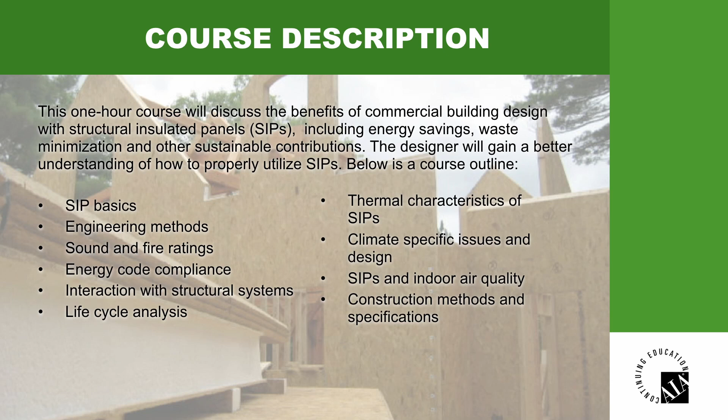A lot of what SIPS is about is the thermal characteristics and how they meet the codes and how they can provide a thermal envelope which performs much higher than some of the other competing systems. We're going to talk a little bit about the climate specifics and how those climatic conditions will change the detailing of SIPS and how you should detail buildings differently, obviously, in one climate zone versus the other. We'll touch briefly on indoor air quality, and of course we'll go over construction methods and specifications as we start to wrap up this presentation.

The objectives of this course will be such that you as a design professional at the conclusion of this course will be able to deliver some basic information about SIPs and their use. This would include both their composition, how they're made up, how they're applicable to codes and standards, additionally identifying the energy efficient characteristics of the SIPs and how they can improve overall building efficiency, a good understanding of waste reduction and the life cycle analysis benefits to building with SIPs, as well as how it relates to traditional wood framing. And of course, understanding how SIPs contribute to better indoor air quality by reducing air infiltration, as well as controlling any off-gassing issues.

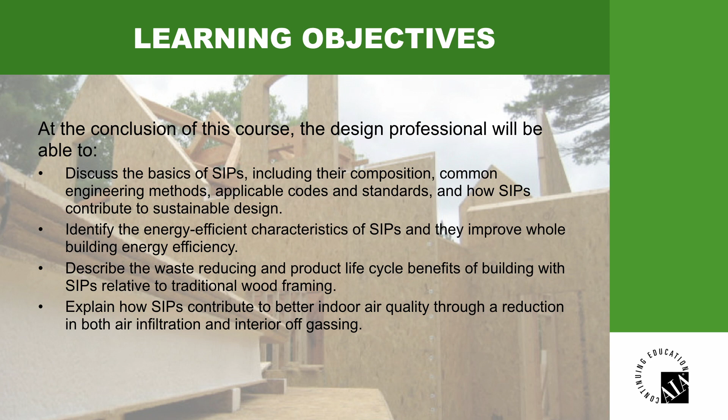So let's get right into it. What is a SIP? Let's start with the basics. What does a SIP look like? What's it made of? In essence, it's a composite structure. It's very simply, in most cases, 3 elements. It's a skin, a piece of wood glued to a foam core. The skin is on both sides. It has to be on both sides because this is what gives it its structural integrity.

As a composite structure, the rigid foam core is predominantly expanded polystyrene. That's EPS, or the white foam, similar to what you see in the photo. In addition, it could be XPS, or extruded polystyrene. This would be the foam that might be referred to as styrofoam, or the foam that might be extruded that would be green. So you might see a colored foam, green or blue. The other option could be polyurethane. Polyurethane is delivered a little bit differently, and we'll talk about that later on. The structural facings, if we are going to use a structural facing and create a structural panel, will usually be 7/16 Exposure 1 rated OSB.

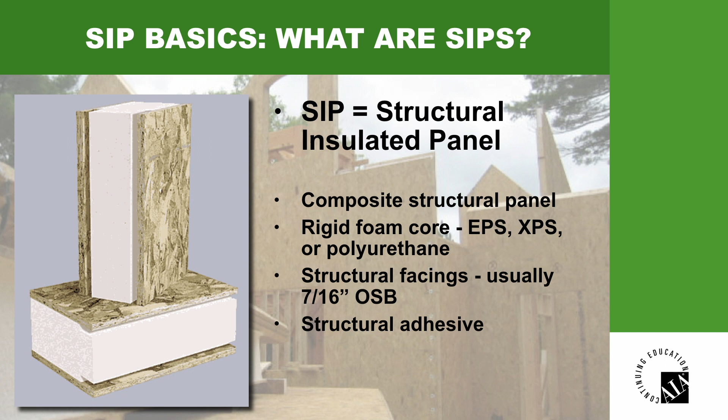And of course, the adhesive is structural in nature. It's very similar to the engineering grade structural adhesives that you might find in an I-joist, glulam, Parallam, any of the other wood engineered products that you see so often in the marketplace.

SIPs are not new. They've been around since the 30s. They were first developed by the Forest Products Laboratory up in Madison, Wisconsin. They were being researched in order to answer the question about eventually running out of wood. Even though it's one of our nation's greatest natural resources, it was determined that we needed to maximize the efficiency of that wood and come up with better ways to utilize it as we built buildings.

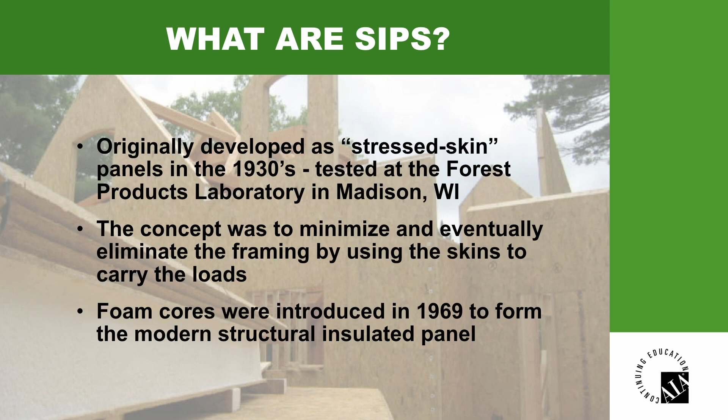And the methodology of taking that wood and turning it into oriented strands to create sheathing. Originally it was done with plywood. Now we're working predominantly with oriented strand board. And of course the foam cores were introduced later in the 60s. That technology, when expanded polystyrene or the plastics from Europe, the European building trades, found its way over into the U.S. market. The combination of the two created the very first SIPs that were laminated in the laboratory up in Madison, Wisconsin.

As I said before, the SIP contains three components: the skin, the core, and the structural adhesive. A SIP has often been compared in strength to a steel I-beam. The skins act as the flange and the foam core acts as the web. And by virtue of the structural adhesive holding it together as a composite panel, in order for it to bend, one of the skins is in compression and the other is in tension, and it gives it a great deal of transverse strength. As you can see in the picture, we also have optional electrical chases. We'll talk about that later in the program.

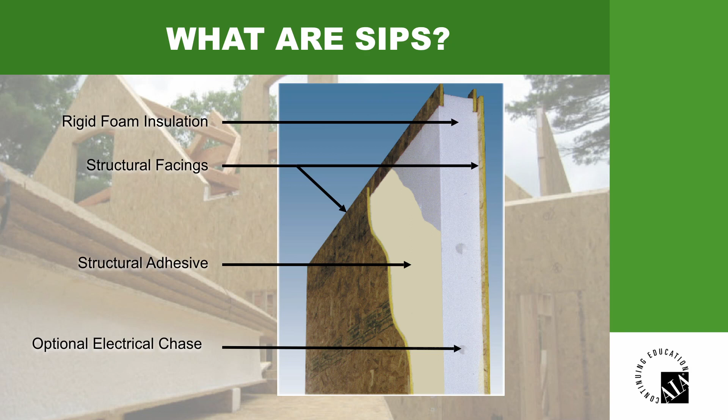There are many different types of SIPs. In this view, you'll see that insulated metal wall panels can be manufactured. They are often used as exterior cladding and will, in most cases, not carry axial loads. Most of the times you see metal skin panels being used, they are put over top of a pre-engineered metal building. So for instance, if a large cooler freezer building or something of that nature is being built, it'll typically be a red iron or a steel structure, and then the panels are attached merely as cladding. And with the metal skin on the face of it, that gives you a finished siding appearance or a finished cladding appearance, with all of the benefits of the foam core, so you get the benefits of the thermal performance of this type of panel.

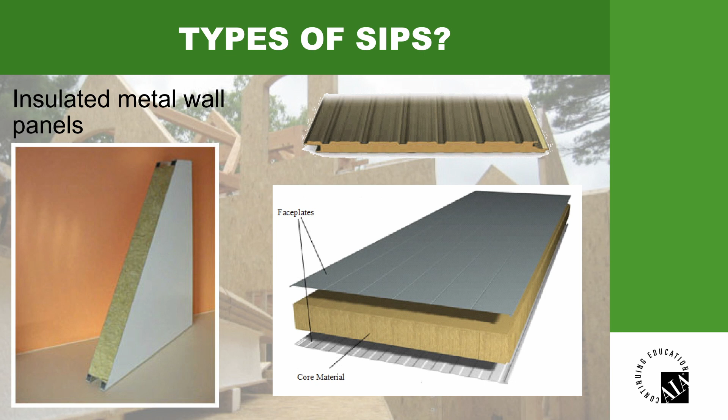In addition, another type of SIP might be one that uses a cementitious board or even an MgO, MgO being magnesium oxide. MgO has come on quite strong lately in the SIP industry in the last 10 years. The magnesium oxide board has a lot of benefits, as does cementitious board. But in both cases, they also have detriments. They don't have nearly the testing, the code approval. In some cases, they can be more difficult to work with. In some cases, they're more difficult to cut, or in fact, they create a heavier panel.

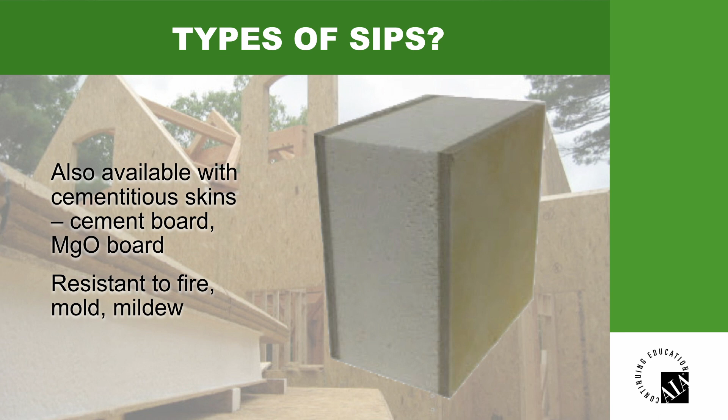All things have pros and cons, and MgO board and cement board and metal skins and other types of hybrid skins are no exception. Understanding what those pros and cons are is key to understanding how best to design the building and how best to specify which type of panel is going to be used most predominantly. The panel that, without question, is what we would consider the standard or ubiquitous panel within the U.S. or North America is going to be the 7/16 wood-skinned panel, but it's certainly not the only one that can be used.

Now, to further understand what a SIP is, it is not a pre-insulated stud wall. It's not the type of framed walls that show up either with or without insulation such that they get put in place. A SIP has a solid core. It replaces the wall studs and provides much higher thermal performance by providing a whole wall R value that is greater, substantially greater, than an equal thickness stud framed wall. It eliminates all the thermal bridges.

It has continuous insulation, so therefore we have the ability to improve the thermal performance, but not just that, we also can improve the carrying capacity. The idea is to use the OSB as the load-bearing element as opposed to using those studs. And this gives you a bearing area that is substantially capable of carrying greater loads.

As a designer, one must select various types of connection detailing. When we talk about SIP basics, an in-plane joint, whether it be a wall or roof, this is one of those very standard details that you might see. On the top left, you see what was referred to as a surface spline joint. The foam is recessed and/or finished in the manufacturing facility to receive the surface splines that are then put in along with either mastic or expanding foam and nailed off on either side of the joint, to bring the panel joint together and give you a continuous structural component.

One of the beautiful things that we like to point out with the surface spline connection is that the foam is continuous. There is no break. Similar to the surface spline detail on the left, if we look to the right, we see what is often referred to as a block spline. The block spline is also sometimes referred to as just a mini SIP. It's a SIP where the splines are laminated to the foam core and they fit into the edge of the panel where the foam has been relieved to allow that miniature spline, or block spline, to slide in. It can be sealed with mastic or foam. It can also be nailed off on both sides and give you the exact same finished result.

Whether the surface spline or the block spline is used is really a function of how the manufacturer has set up their operation in terms of treating the edges of the foam or the panels. Either one of these details is free of any thermal bridging, which gives you greater thermal performance because of a lack of heat transfer at the joints, and it is also an easier joint to seal to reduce air infiltration or exfiltration. When installing the panels in the field, stopping air infiltration and exfiltration is really key to optimum performance of a SIP system.

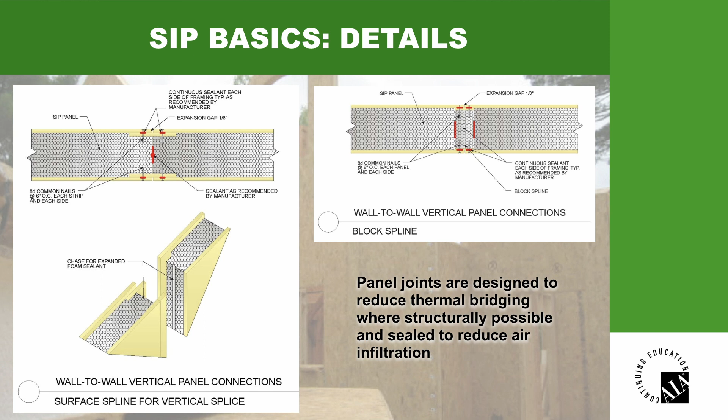One of the other SIP basics that you need to understand is R values, and R values can be a very tricky thing. First, let's look at the chart, all the way at the bottom at one of the notes. R values are determined or marketed at the mean temperature of 75 degrees Fahrenheit. We choose this temperature because foams will perform differently as the temperature increases or decreases. Some foams will also stabilize at an R value different than they are initially manufactured at, so the term aged R value is also important. Understanding both factors sometimes explains why manufacturers' claims of R values can seem higher or lower with no apparent explanation.

This chart gives true and fair R values that can be utilized when comparing the different types of cores. The EPS core in a 6.5-inch panel is around R-21.6. If we move to an XPS, it jumps up to 29.5, and all the way up to 32.9, or rounded to 33, in a polyurethane core. Understanding this is key to delivering the thermal performance required for your structure, and when considering whether you are meeting code requirements under either the prescriptive or performance method, keeping in mind there's more than one way to become compliant with the model energy code, and R values are a big part of that.

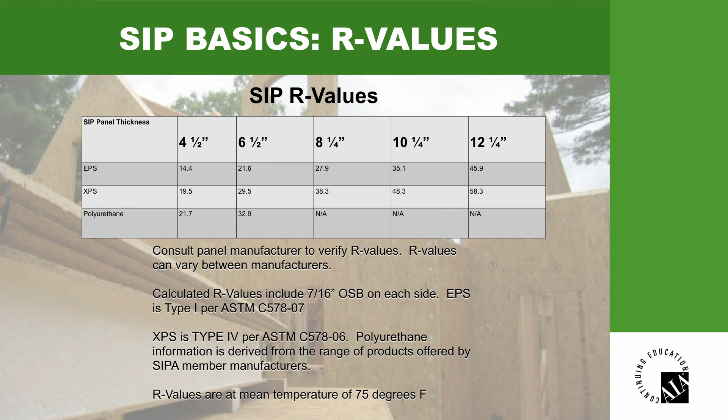Another basic detail shown here is what you might see in a corner. If two wall planes need to come together, we need to attach the two. The screws provided by the SIP manufacturers within SIPA include screws that penetrate wood, as well as self-tapping screws for light duty and heavy duty. The screw tip on the far right will self-tap into mild red iron up to 1/4 of an inch thick, so we can attach directly to a steel structure.

In the detail, the top panel runs long and the vertical panel is running short, and the connection of the two is the SIP screw, which penetrates into the shorter panel and pulls the joint together tightly. This joint is sealed with either foam or mastic, which stops air from moving in or out through that corner detail. Mastic is probably the most commonly used sealing method for a wood-to-wood connection.

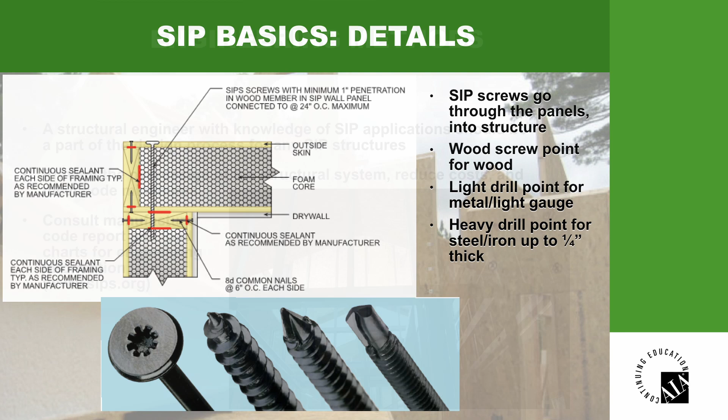One of the things I often see in commercial structures is the use of engineers in the design process who are not familiar with SIPs and tend to fall back on what they know and not what they need to know as it relates to SIPs and SIP construction. This will often result in buildings being over-engineered, which drives the cost up.

This is especially important in commercial buildings and hybrid systems such as SIPs with steel. Understanding how the SIPs can work, how they will provide structural support and structural stiffness to a building is key to understanding not only the design of the joints, but the fastening, the number of fasteners, how they are specified, and how the entire system is going to hold together and deliver that which is needed and not be over-designed and run costs up unnecessarily.

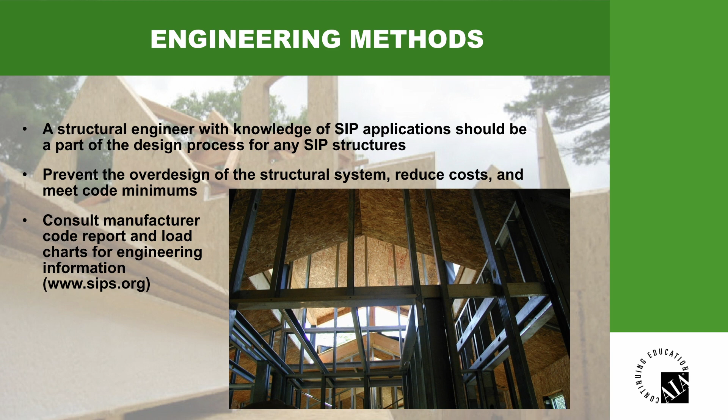Design professionals, engineers included, have the ability to use charts which are available from SIPA manufacturing members, and these charts will deliver all kinds of data that help determine the best design and the best detailing to deliver the proper performance. In this case, we have a chart that shows allowable axial loads, which will help determine the appropriate wall thickness. The engineer can use this chart to determine which panel thickness will be required based on the allowable loads that are going to be put on a specific wall.

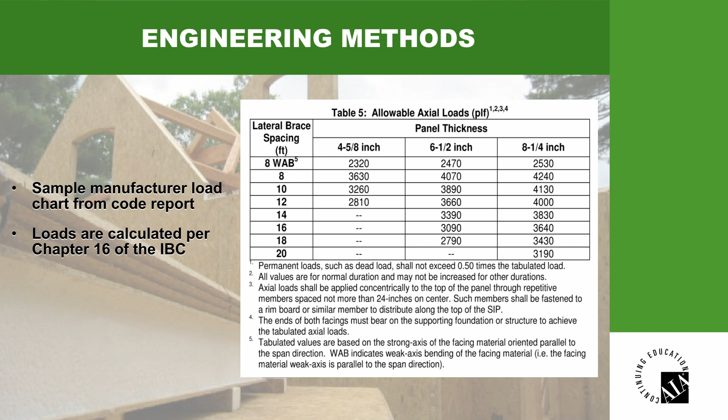In this case, the chart references transverse design load. Here we have transverse design loads for walls and roof, and this helps determine what the span and/or the spacing of the structural elements are within a structure. Not only the thickness of the panel, but the span and the allowable deflection will determine what the overall loading of that panel will carry based on the span.

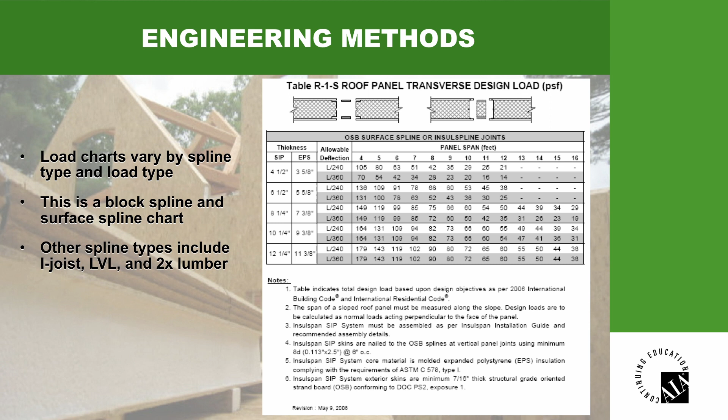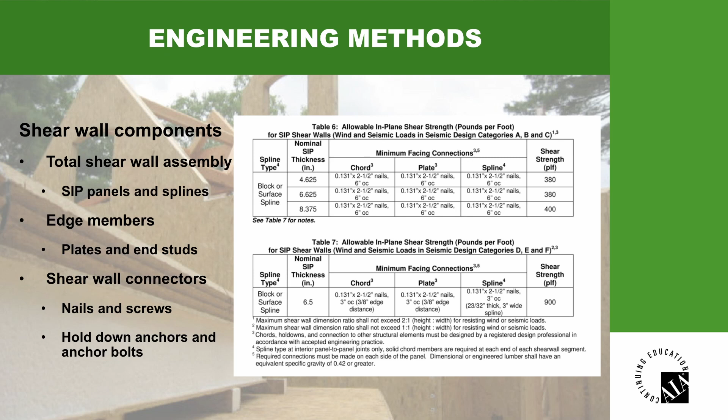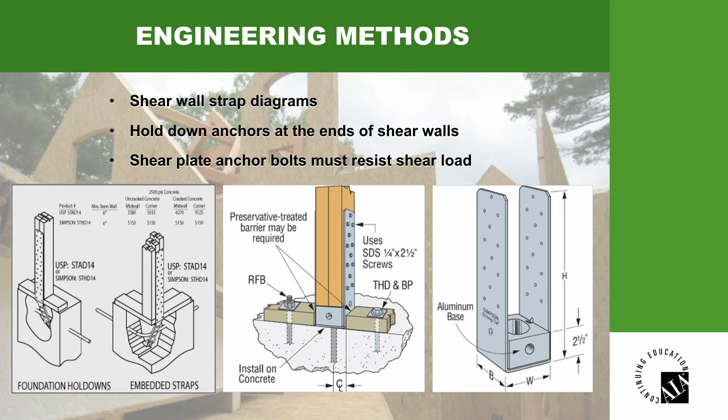And in that shear wall, it may be required that additional panel joints with dimensional lumber at that joint connection allow these anchors to be appropriately attached such that we can deliver the amount of resistance required for that shear wall. The values provided for shear walls are available to cover the seismic design categories, in addition to diaphragm values for the wind or transverse wind loads on the design for both SIP roof panels and walls. These are all available from the manufacturer.

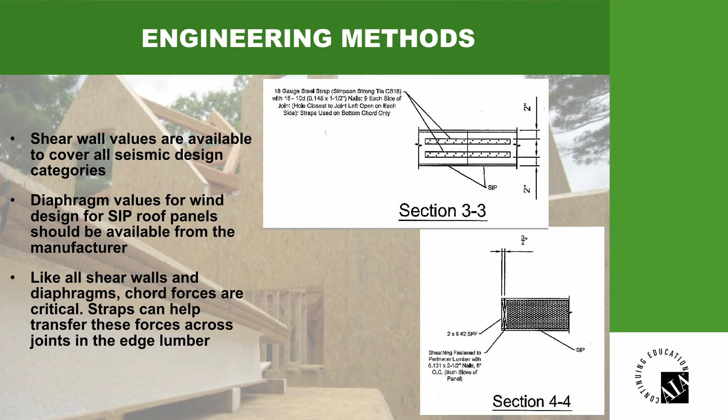And in all shear wall examples and diaphragms, the chord forces are critical. The manufacturers will provide and have the data that shows how straps can help transfer these forces across joints, especially those joints where we have lumber inserted, as we talked about in the earlier slide, where lumber joints may be required for proper attachment of hold-down anchors.

One of the often asked questions about structural insulated panels is headers, and do I in fact need headers? There are some simple rules of thumb, but what it really comes down to is how wide is an opening and how much material is above it. And ultimately, do I have a point load above that opening? This will determine whether a structural header is needed.

In many cases, with a uniform load, a fairly narrow opening, and a significant amount of SIP panel left above that opening, the panel, by virtue of the fact that it is structural, has the ability to act as its own header. So when we get into the design, one might suggest that you could eliminate cost, speed construction, and improve the thermal performance merely by making your openings somewhat smaller, or keeping enough material above those openings such that the panel has the ability to act as its own header.

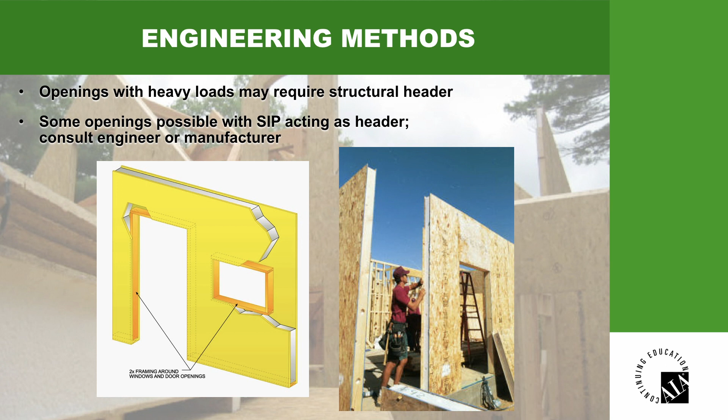The manufacturers have the charts which allow the designer, the design professional, or the engineer to determine whether, in any specific example, a standalone header is required or the panel can act as its own header.

Now, talking about fire ratings with SIPs, we must think of a SIP as a rated assembly, much like any other wall assembly. And a rated assembly is tested just as an assembly, not its individual components. Because the SIP is made out of wood, it has various restrictions that we must consider. We have to think of the assembly and not just the parts. Insulation or even wood is flammable, and so are many of the parts of an assembly.

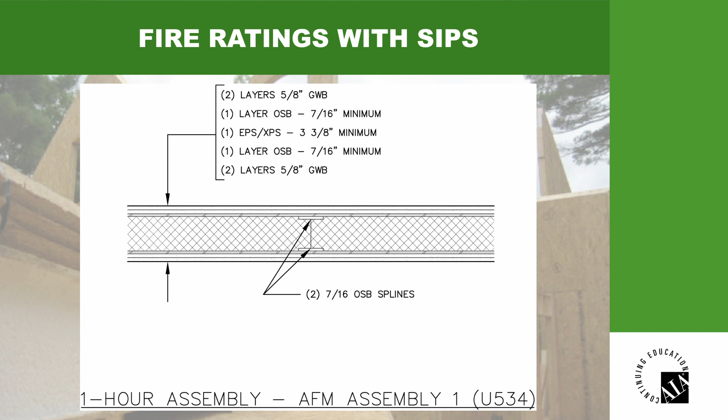Therefore, we layer on different components to get the type of rating that is desirable, and that's how SIPs create a fire-rated assembly. In this case, you'll note that over top of a 4.5-inch standard SIP, we apply 2 layers of 5/8-inch gypsum wallboard to create the 1-hour rated assembly.

Different types of fire-rated assemblies can be seen in this slide. On the left, you'll note that we still have a 1-hour assembly, but here a different type of spline detail is shown. This, of course, is the double-dimensional lumber spline with the same types of layering over top, only in this case with a single layer of 5/8 gypsum wallboard, and again we're seeing a 1-hour assembly here.

We move to the right, we see a 1-hour rated assembly only on one side of the panel, where we're applying 2 layers of the 5/8 gypsum wallboard to the inside, and of course the beam required to provide the structural support, and again we note that we have a 1-hour rated fire assembly.

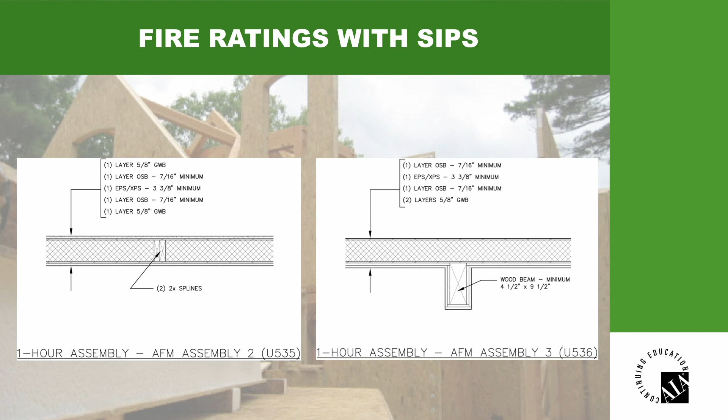If we move away from fire and we start talking about sound, we have to consider how SIPs perform in blocking or absorbing sound. This can be fairly complex. The sound transmission class, or the number that defines the rating of that assembly, is a function of how the sound is absorbed or passes through. STC-rated wall assemblies for SIPs have been tested and are similar to stud framing systems in terms of values. The SIP walls also perform very well with high frequency or low energy noises.

Where they tend to fall down is where we have very low frequency and high energy noises, where the SIP acts as a diaphragm, which of course it is, and it can transfer that low, heavy beating or thumping noise through to the inside. And this is where we have to add additional layers to get the type of STC numbers that we want.

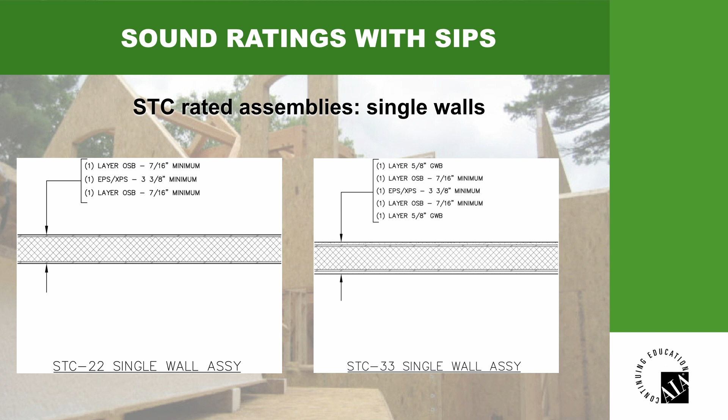If we look to the slide to the right, you'll notice that the STC number has now jumped to 33, substantially increased over the slide on the left, and this is because we've attached gypsum wallboard to both sides of the assembly. One layer of 5/8 gypsum wallboard adds a lot of mass, and of course mass helps the STC number or the sound performance go up substantially. In this case, we're up to an STC of 33, still a single wall assembly.

One thing that we have noted over the years with SIPs, even though in some areas the STC number seems to be relatively low, is that it must always be considered that a lot of sound travels through assemblies by virtue of cracks or holes in the wall assemblies. When you have a leaky assembly that leaks air, it also leaks sound. So sound that travels on air doesn't get into an airtight structure.

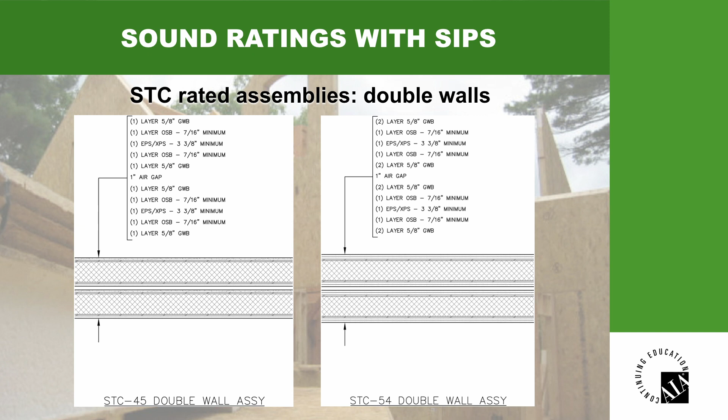Whereas if we make that structure airtight, the only way that sound gets through is by going through the wall assembly, and this is why the low energy, high frequency sounds tend to cause our STC numbers in the SIP environment to drop quite substantially. Adding that mass and making an airtight assembly will create a very soundproof assembly, and clients have time and again told us that SIP houses perform very well when it comes to soundproofing.

This building, located in New York, is an example of SIPs in metal framing as well as structural steel.

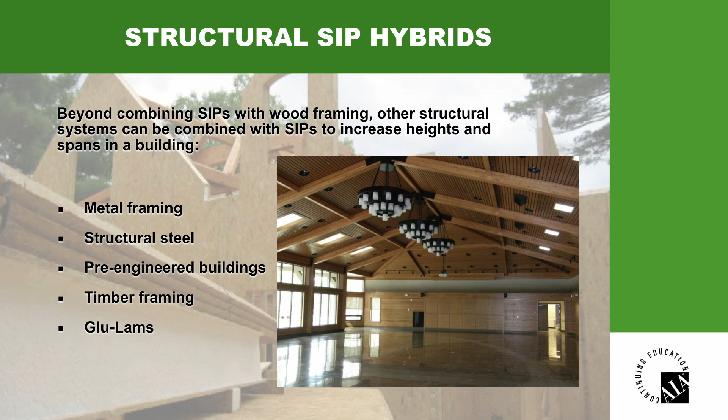It uses a 6.5-inch wall panel. When I say 6.5, it typically means a 5.5-inch core, which will accommodate a 2x6 dimensional lumber inside between the skins, so we call it a 6.5-inch panel, and a 10.25-inch roof panel. The panels are over top of structural steel beams.

The beams are separated by 18 feet, so you got an 18-foot span on the roof panels, and inside the panels, the SIPs are spanning from beam to beam, and they have a structural I-beam, wood I-beam, as the joint, in-plane joint connection on 4-foot centers that help allow that roof panel to carry that large span.

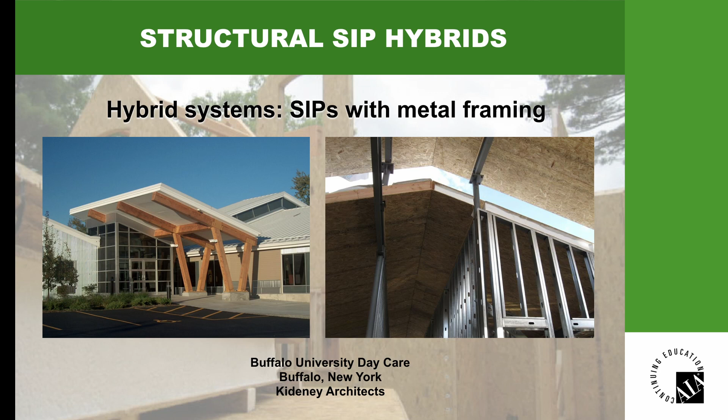Not only can it span those distances, which in some cases allow us to remove a significant amount of steel to help lower the cost and make the building lighter, but also the panel, by virtue of the fact that it's a continuous diaphragm, allows for the bracing or a reduction in some of the bracing, cross bracing, that you would typically see in a steel structure. The roof itself is acting as a giant diaphragm or a giant brace on top of that steel I-joist.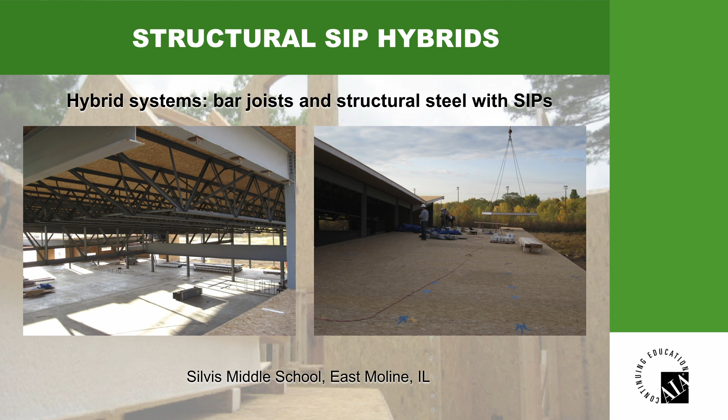The success of this building is really a function of the coordination of both the architect, the structural engineer, the SIP engineer, the SIP manufacturer, and even the installer of the SIPs. All these people must work together in order to guarantee the success of the project, such that everybody knows what is being done, how it's being done, what the details are, and how the building is going to be put together.

The roof was all 10.25-inch panel, and again, I point out the fact that the purlins, or the roof beams, are spaced wider than you would normally see in a building of this type and size located in Minnesota, where the snow loads are substantial. And the reason they're doing this is because the panels have the ability to create some of that span. So you're still handling all the loads, you're just doing it a little bit differently. And while you do that, you have the ability to reduce some of the steel costs, which lowers your overall cost of your structure.

This building has an unbelievably low heating bill throughout the entire winter, and they save hundreds instead of thousands of dollars a month during the winter by virtue of the fact that their heating bill is so low. I mentioned timber frames earlier. SIPs and timber frames are a natural fit. We sometimes will say it's the technology of today over the old world craftsmanship of yesteryear.

In this case, you'll see the traditional mortise and tenon timber framing, and then the panels wrap that frame. And when they do wrap the frame, they actually give that frame an unbelievable amount of stability and bracing where the panels can act as a shear wall.

Now, if we look at this big gable wall with all the windows on it, I would suggest that that's not necessarily going to provide all of the shear just by virtue of the panels because of all of the openings. So there's some real engineering that has to go into this design, one for the gravity loads of those beams which penetrate the structure, and underneath that there's going to be posting all the way down. But the timber frame and SIPs provide beautiful structures.

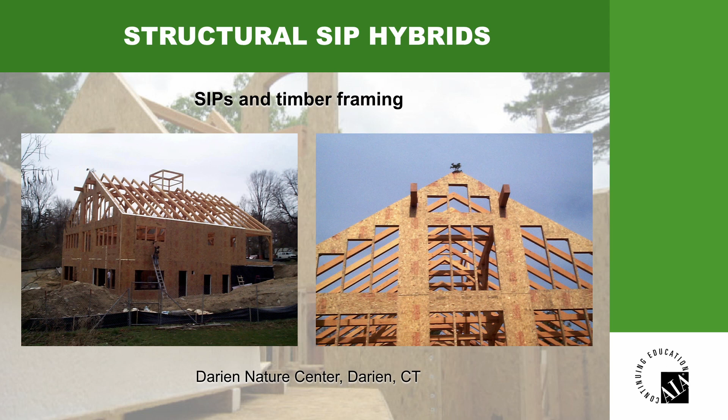They are relatively easy to work with, easy to build, and having panels that are as large as 8 by 24 means that we can cover a frame up very, very quickly. And of course, attaching to the wood beams and posts and purlins is very easy for a SIP installer.

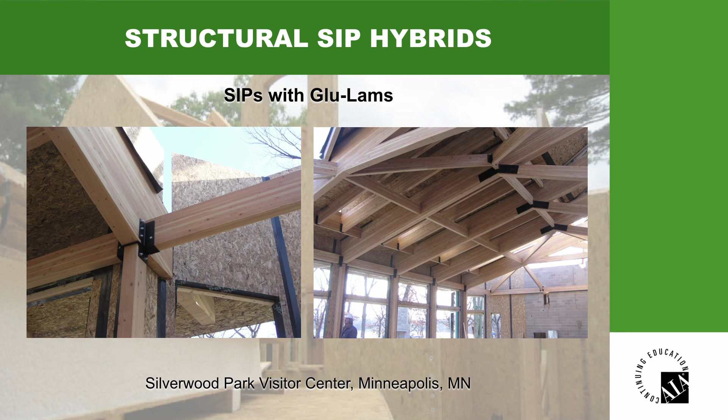Here you can see various glulams with structural steel connectors. This provides for a very interesting look, and with all of that wood in there, certainly the attachment of the SIP wall and roof panels is very, very easy. It's a very nice design, and again, it allows the architect or the designer a lot of latitude on what the building is going to look like and still providing optimum performance.

One of the concerns we always have as we move into design is code compliance. And as the compliance for the Model Energy Code increases, as we have seen both in the 2012 and the 2015 codes, the use of continuous insulation provides a significant benefit, a higher R value, and of course airtightness becomes a very key element in code compliance as the Model Energy Code increases even more and more. The 2012 has seen a 13% increase in efficiency over the 09 and 30% more efficient than the 06.

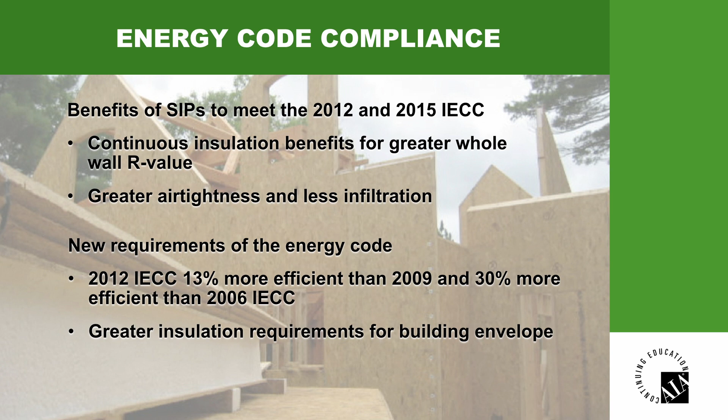So these insulation requirements in the building envelope continue to increase, and SIPs in every way, shape, and form, I will say, easily allow compliance with the code as it relates to delivering an airtight continuous insulation envelope.

A key element of code compliance, and even more so than code compliance, is the detailing, is to fully understand the IECC climate zones. The climate zones are broken into moist, marine, and dry, and they, of course, in the lower 48 go from 1 to 7. Depending upon where you're designing, very clearly should dictate how your design addresses the movement of heat or addresses the movement of humidity within that structure.

And your design detailing very clearly should take the location you're building into effect. We don't design buildings for Florida the same way we design buildings for Minnesota, because they don't work. The building science rules must be strictly adhered to in this situation.

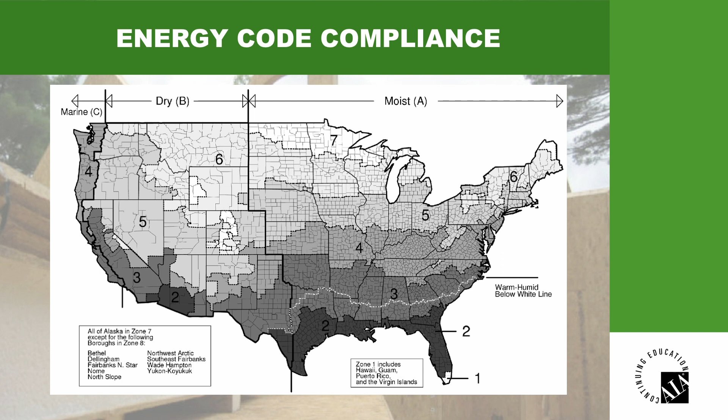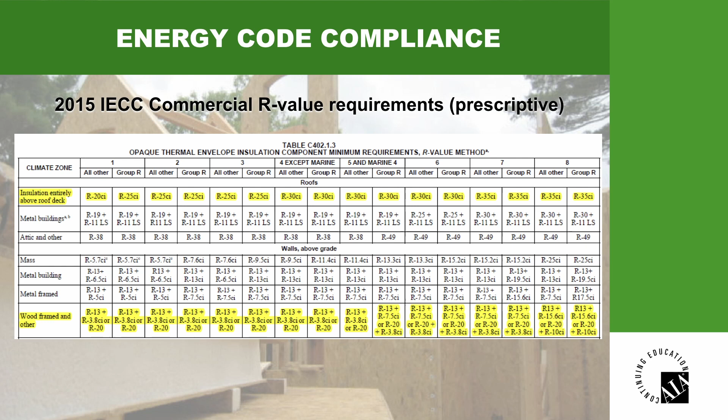Before we look at the other methodology of code compliance, i.e. the performance method, let's talk about why that might be beneficial. If we go to the Oak Ridge National Labs and we look at their studies that they've done on SIPs, they break down what continuous insulation, no thermal bridging, and how that affects the overall R value.

If we look at the R value of just the insulation, for instance, in a wall insulated with batt insulation, we're again just looking at the insulation, and it might be an R13 or an R24 or R30, whatever that might be. That doesn't take into consideration the framing factor or how much stick framing there is in that wall. If we look at the SIP, where the framing factor is infinitely lower, we have what the code allows us to refer to as continuous insulation.

By having greater amounts of insulation, and on top of that, far less air infiltration and exfiltration. We can see in this chart that was part of Oak Ridge's study that a 4.5-inch SIP, pictured on the far left, had an R value in whole wall performance actually greater than the 2x6 stud wall, 2x6 studs at 24-inch centers, with a quality installation, meaning the batt installation was installed properly per the manufacturer's recommendation.

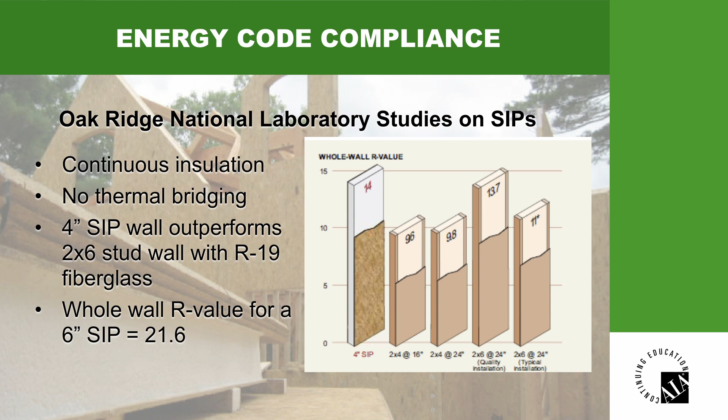So even in this case, although the rated R value is actually less than the 2x6 stud wall, in whole wall R value performance, you'll see that the 4-inch SIP outperforms the 2x6 batt insulated wall. Very interesting when you consider how assemblies truly perform more so than what the rated R value is.

And of course, if you do not believe the whole concept of thermal bridging, all it takes is a little thermography to look at a wall when it's warm on one side and colder on the other, and you can very quickly see how it is that thermal bridging, or the transfer of that thermal energy through any solid lumber components inside that wall, will very quickly rob your building of optimum thermal performance.

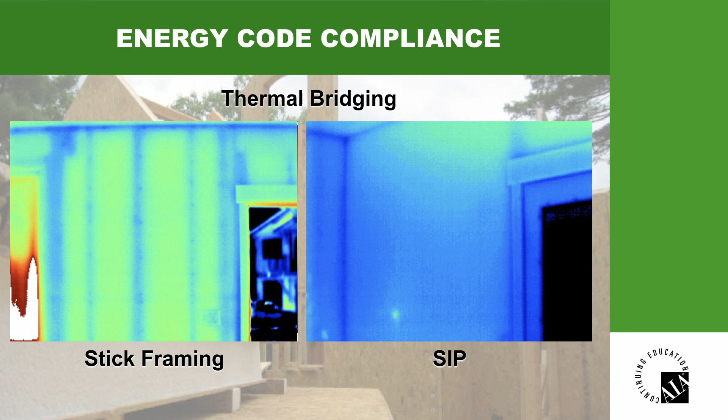Okay, let's get back to code compliance as it relates to the performance method. In the performance method, we don't necessarily look at a line in the sand for a particular R value and say that meets the prescriptive method, or that meets the value required by the code. We look at the entire building, and in that whole building, we model the building using any one of many different types of software packages, basically doing a Manual J calculation and determining what the overall BTU heating and cooling requirements are.

And when we do this, we take into consideration air tightness, and the air tightness has a huge influence on the overall performance of a building. And therefore, the performance method allows us to show code compliance when the prescriptive method might suggest that that very same building is not compliant with the code. And of course, showing this code compliance means that in many jurisdictions, the code official will require that COMcheck or other approved software is used to verify that that meets the code.

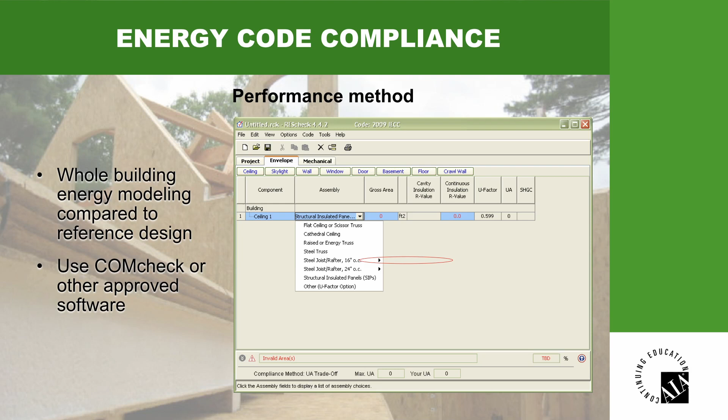One of the other issues that often comes up is the idea of Energy Star commercial tax credits or tax deductions. And in this case, Energy Star currently provides credits or tax deductions which equate to $1.80 per square foot. And this assumes a certain performance level of the building. So using the approved energy modeling software to show that the building performs at a certain level, this will show code compliance and perhaps allow for commercial tax credits.

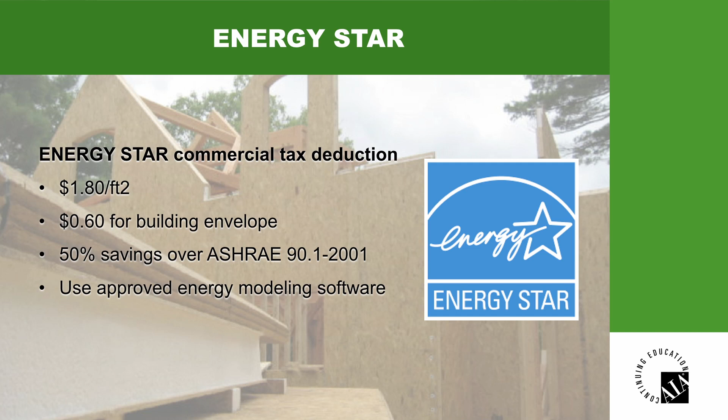Now, in order to get all of the optimum performance and the tax credits and all those other things that both you as the designer and the owner of the building want, requires proper installation. And installation is really a very key component of the success of your design and your building. In order to get good installation, we have to always be addressing air tightness. Not only do we have to hire and specify somebody that knows how to install panels, but there should be a methodology to prove and verify that the air tightness is in fact being delivered by good installation.

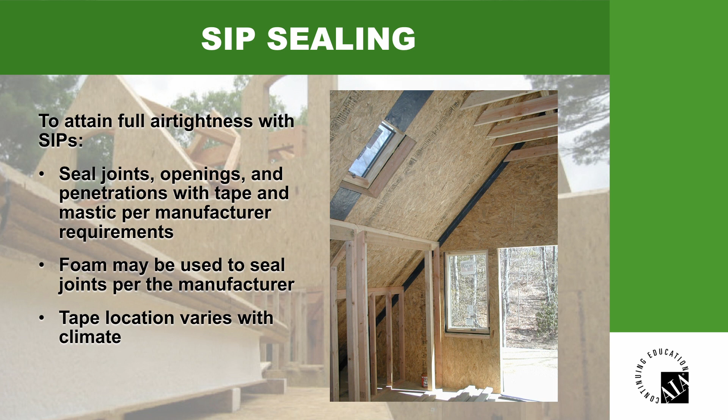When the installers of panels are working in the field, they have a number of methods by which they can create an airtight joint. It might be a gasket, it might be an injected foam, single component or two component foam, it might be mastics or tapes, and all of these details are largely driven by the manufacturer that is being used, and this will dictate how the installer uses these components to deliver a very airtight, high-performing assembly.

Many of you may be familiar with the architectural challenge known as the 2030, which can be found at architecture2030.org. And this is a challenge to architects and design professionals to improve our built environment. It is a movement towards the reduction of carbon emissions and eventually to meet carbon neutrality for the building industry in 2030.

And it's based on the idea that we can build buildings with greater insulation, greater continuity of insulation, as well as air tightness and reduced infiltration, things that I've talked about before, and of course reducing the construction waste so that all of our buildings are more gentle on our environment and will deliver higher performance for this carbon neutrality for all of the buildings by 2030.

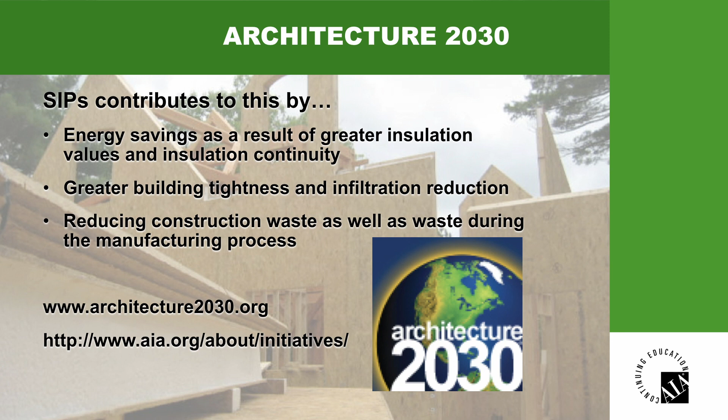We touched on life cycle analysis earlier, and basically, as you probably well know, the life cycle analysis looks at the manufacturing of a product all the way from the very beginning of sourcing its raw materials all the way through construction, and then how much energy it consumes over its life. In essence, what we're saying is we use a lot of energy to mine and produce the materials, the natural resources that are used to build a SIP, and that might be higher than other forms of construction.

But then once the project is built, we're saving energy substantially more so than over two-by construction. So what happens? Well, over a certain number of years, we start seeing a payback in that we are saving more energy than we ever used to produce those components.

The EPS Molders Association's analysis shows that within climate zones 1 through 5, you're seeing an average payback of about 5.1 years, and that is even a little bit lower in terms of recapturing the greenhouse gas emissions. Again, zones 1 through 5. If we go to the higher zones, it happens even quicker because we're saving more energy comparatively in the colder climates. Other analyses have been done both by BASF and the Oregon Department of Environmental Quality.

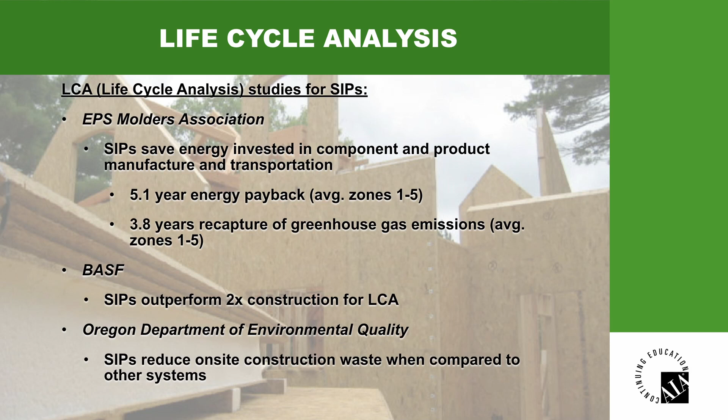The BASF study showed that the SIPs outperformed 2-by construction for a life cycle analysis, as well as the Oregon Department study showed that the SIPs reduced on-site construction waste when compared to other types of systems.

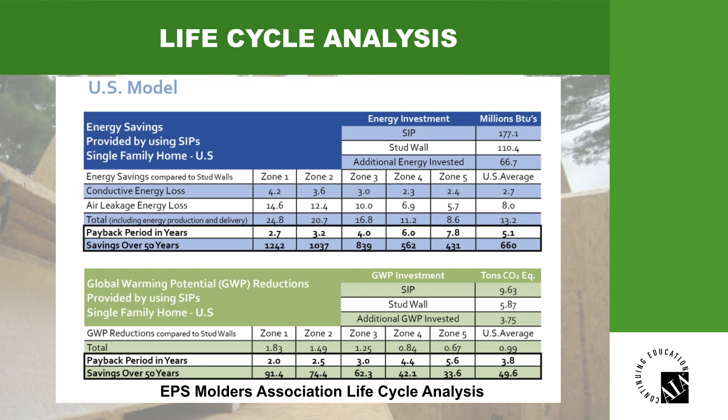And then if we drop down to global warming potential reductions, we again see that comparing the SIP and the stud wall, you have a difference in terms of tons of CO2. The SIP appears to be greater, but then as the structure is lived in and the savings compared to the stud wall, you get an overall comparison of a payback of about 3.8 years before you're starting to see the savings in CO2. And of course, if you look at the savings over 50 years, you see almost 50 tons of CO2 being saved over that equal stud frame wall.

Why we want to look at this is because we're concerned about any water vapor or moisture within the assembly. Will it ever condense? So if we have any leaks or any movement of air in that assembly, if that warm, moist air comes in contact with a cold outside skin, we have condensation, and condensation leads to mold and rot and mildew, and we don't want any of that.

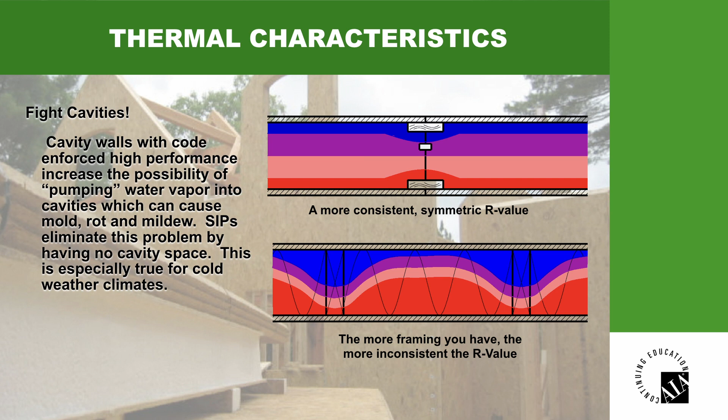We talked earlier about climate zones, and here we're talking about climate-specific design as it relates to various areas in the country where we have more or less moisture that we have to address. If we live in an area of the country where we get a lot of moisture, the detailing must be different. We do this because of the durability of the structure. This is not a SIP-specific issue. This is any building issue. Where it rains more, we must allow for the drying potential of that building.

Special consideration should be made for designing with SIPs in cold and wet climates. And it's done to prevent intrusion as well as mold growth, which imparts poor indoor air quality and creates hazardous environments for the indoor occupants. With water intrusion, the bulk water and liquid moisture from the outside coming in is done so through wind-driven rain.

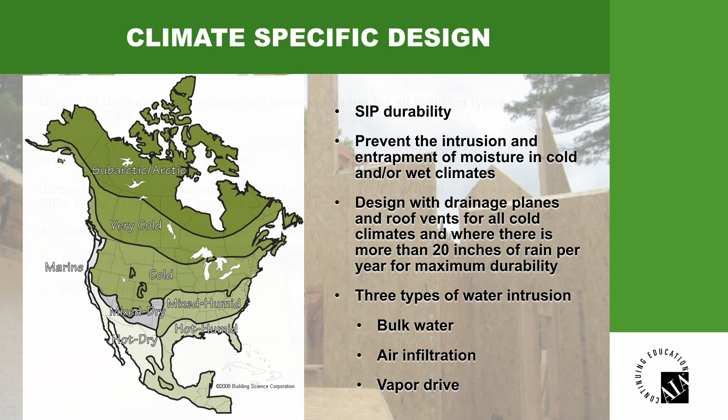You must know what climate you are building in to effectively put the proper detailing on your drawings to address not only bulk water, but air infiltration as well as vapor drive. We start talking about climate-specific designs, and the idea of building science really comes into play.

I'm a huge proponent of back ventilation or drying. SIP structures and other high-performance, low-energy buildings automatically have a lower capacity to dry because they don't have a lot of energy or heat moving through the assemblies to help them dry out. Because they don't have a higher capacity to dry, we need to promote within our design additional opportunities for those

Consider Murphy's Law in that moisture is always going to get into your assembly. In one way or another, it's going to get in. So your job is to create a methodology for it to get out. Easily and quickly, your assemblies should be able to dry.

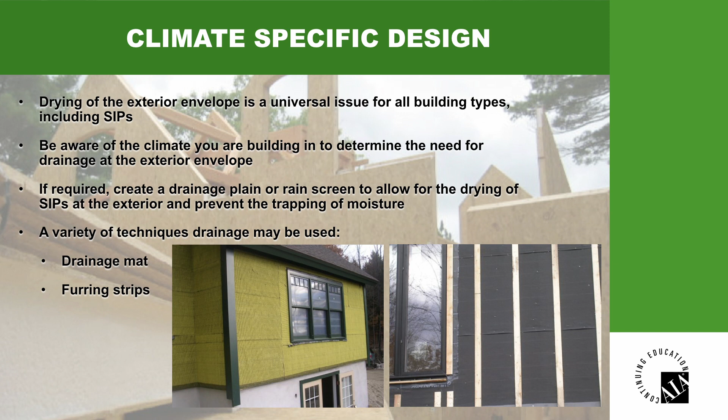Whether you use a drainage mat or furring strips, whatever your strategy, the climate zone that you're building in and the amount of water and vapor that you need to address should determine how robust a drying opportunity you give your building to lose that moisture and dry out on whichever side the system has to dry.

As we look at the cladding of your structure, regardless of whether that cladding is wall or roof, we need to consider what is the appropriate method to drain that moisture away. Roofing paper is an acceptable means to help dry or help create a drainage plane under your cladding. In this case, it might be shingles, to move that moisture down and away from your building.

If you're in the colder weather or the wetter weather, then perhaps not just roofing paper, but again, we go to back ventilation where we build a second layer of roofing or we use some type of ventilation matting to provide for the movement of more air under that cladding to help dry things out.

In some cases, standing seam metal roof. It's a wonderful roof cladding, but in the right environment where we run the risk of additional moisture being trapped underneath that metal, then perhaps a ventilation mat is required to help increase the durability of that structure. Now, if that metal wasn't standing seam but was a multi-crimped metal, well, you have a self-ventilating cladding.

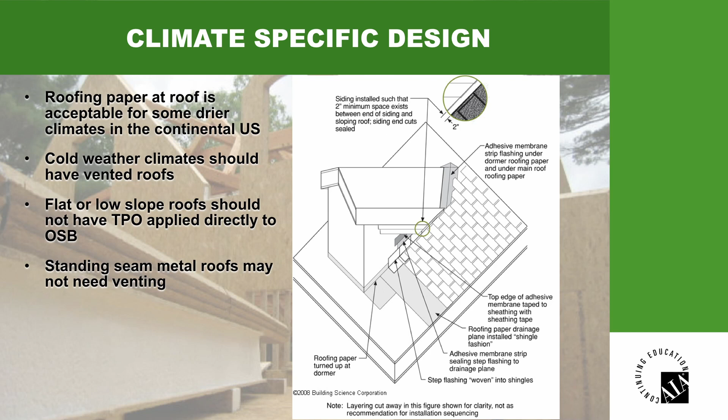Key element is always to look at what type of cladding you're dealing with. If that cladding is self-ventilating, it's got a built-in methodology of promoting drying. So in some cases, in climates where I'm worried about moisture, I will automatically look to claddings that are in fact self-ventilating. For instance, a tile, a multi-crimped metal roof, some types of sidings which allow for air to move behind them. Some of the shakes or the shingles that have an attachment such that it creates airflow behind the cladding itself.

I want to talk briefly about indoor air quality as it relates to SIPs, given the fact that they use OSB as their standard sheathing. The OSB of old used a urea resin in their binders, which provided for formaldehyde in the product. Today's OSB is produced with a phenolic resin, and the amount of formaldehyde is absolutely negligible.

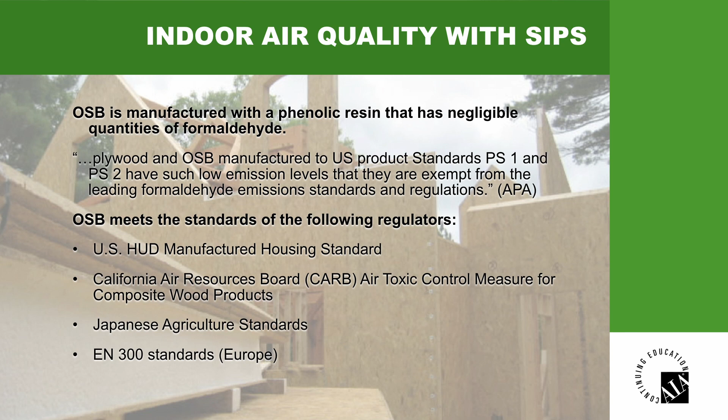We can easily show compliance by using the product standard, which is a PS1 or PS2, low emission levels, which are compliant with both HUD manufacturing, California's CARB ratings, as well as Japanese and European standards for formaldehyde. In essence, formaldehyde is virtually a non-issue as it relates to SIPs when using OSB. The amount of formaldehyde that you will see in testing is below the amount of formaldehyde that you will be exposed to if you were to be outside in the natural environment.

As the designer, there are many things that you must pay attention to during the design phase to ensure the successful outcome of your structure. Coordination in all areas may need to be rethought when considering a SIP structure. For instance, HVAC. Who's doing the sizing of the HVAC system? What is the actual tonnage based on the low energy consumption of this building? In most cases, rules of thumb will absolutely put you in the wrong size system and must be avoided at all costs.

So proper design and size equipment has to be taken into consideration, as well as window and door openings. Electrical. Somebody needs to talk about electrical runs requirements such that the owner's requirements, the need for electrical, is addressed by the design of the panel drawings, and the manufacturer has the ability to put electrical chases where required.

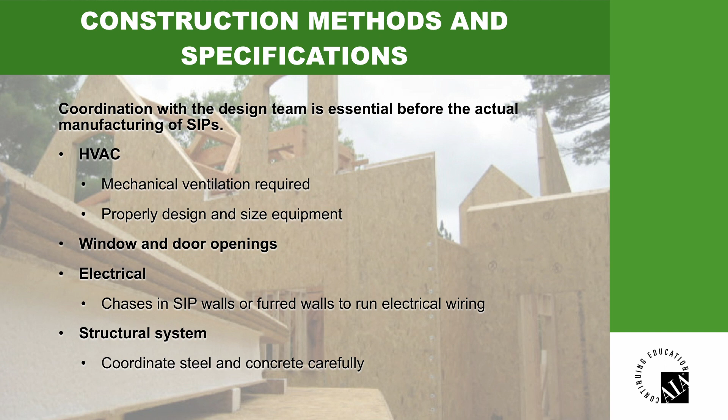The structural system, coordinating the steel and the concrete so that we have the appropriate support and the tolerance of those support systems such that the SIP system works appropriately on this. Coordination with the SIP manufacturer is going to be key, as well as the installer of those SIPs, so everybody again is on the same sheet of music and the success of the building is ensured because of proper planning.

Talking more about SIPs electrical, or the electrical systems within a structural insulated panel wall or roof, very easily addressed by the manufacturers having developed standardized wire chases which are placed inside of wall and roof panels, either horizontally or vertically, to allow for the standard movement of wiring through the panels for easy connections, either connections around walls from floor to floor, or as well as into any box or lighting box for the electrician to make those connections.

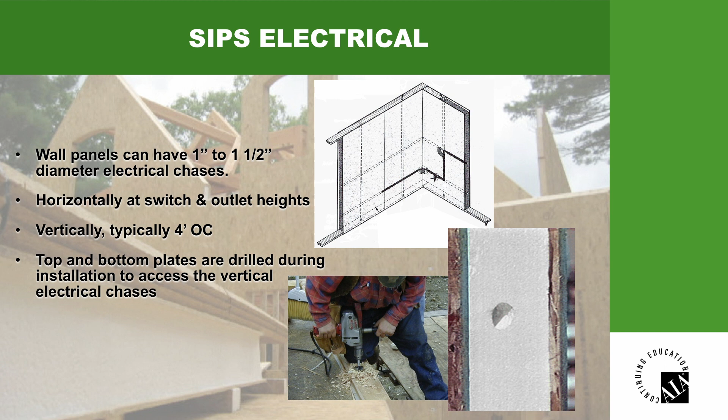We have standard heights. Those can be removed, they can be added. Holes in SIPs can be provided by the manufacturer to allow for any of these mechanical system runs, specifically electrical, and you can also request additional wire chases if, for instance, you had a sconce light and you needed a horizontal wire chase at the 6'2" level off of the floor. It can be done. It just needs to be discussed. It needs to be coordinated with the manufacturer, so when the panels are delivered, they are in the configuration that makes your building a success.

Specifications are incredibly important, assuming that they're going to be followed on your particular project. This allows you to specify types of panels, as well as very specific things like installers that are required for this particular building. You can find specifications certainly at the Structural Insulated Panel Association's website at sips.org. You might also find those boilerplate specifications on the particular manufacturer. They provide those specifications. Of course, those manufacturer specifications are going to predominantly promote one particular type of SIP, which is the one that they produce. So more generic in some cases might be more beneficial for your particular project.

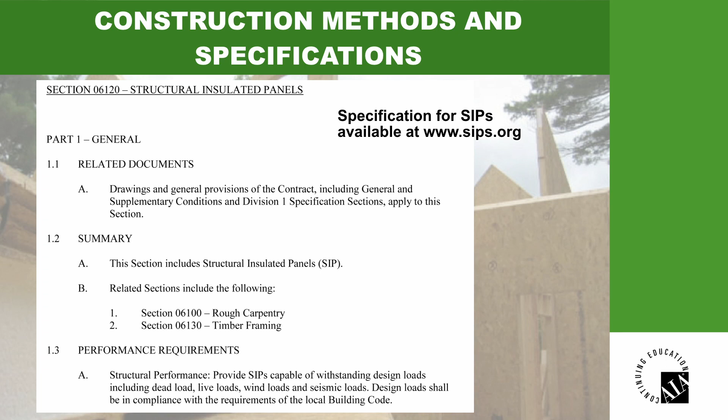The one area of specification that I am going to harp on specifically is the next one. In this case, the specification looks at quality assurance, and this is where I harp a lot on specifications for people that I consult with, and that is not only should the SIP manufacturer be a SIP Association member, and I say that because all manufacturers of SIPA meet strict compliance for quality assurance, meaning that they have testing, they have code approvals, and they have third-party inspections of their facilities to ensure that a quality panel is being produced and delivered to your job site. So the specification of a SIPA member manufacturer, I think, is very important.

When it comes to structural design, I think that a professional engineer in all commercial buildings, almost without exception, is required, such that we're working with an engineer who understands SIPs, and you're going to get the best bang for your buck out of that SIP structure. And C on quality assurance might be the most important one you'll find, and that is your installation contractor. If you let a standard framing crew that has no experience and no training install the SIP package, you run the risk of having a structure not perform the way it should, or small issues that might crop up with an unqualified installer may lead to bigger problems because they don't know how to address them because they've never received the training.

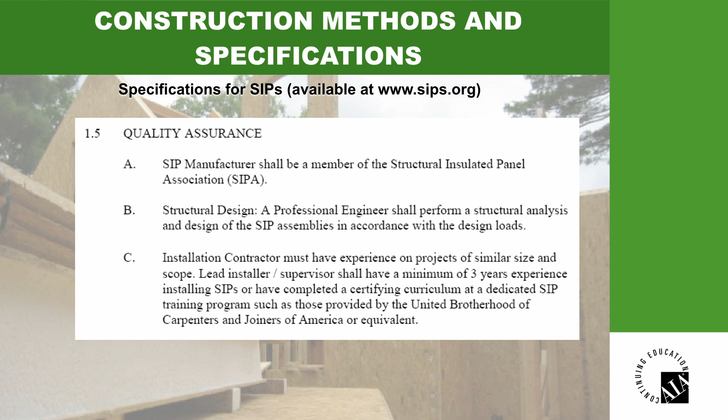Having a lead installer or a supervisor that has a minimum number of years of experience is great, and that's all fine and well, but just because they've been doing it for 3 years doesn't mean that they've ever been properly trained. One that has some level of certification or one that has passed some type of curriculum, I think, is going to be the best bang for your buck, and that's one specification I absolutely would encourage you not to allow to be broken. Put somebody on site that understands SIPs, has put them up, and can show that they've put them up successfully. Nothing worse than having a wonderful building and a perfectly good SIP package delivered to a job site only to see it improperly installed by an unqualified crew.

This also assumes that the panels have been properly designed. They have been fabricated in the manufacturer's facility and delivered to the job site ready to assemble. You will in some cases hear the term ready to assemble or ready to install, and this basically means that the panels are just that. They're ready to start standing up as soon as they get to the job site.

If you were to deliver a truckload of blank panels, you might think, well, gee, I'm saving a lot of money on my panels, but you have destroyed the opportunity to increase the close-in or the dry-in time, because now the installer or the trades on site need to start cutting panels on site. You've lost all the benefit of a structural insulated panel by doing that. Take advantage of the CAD design and the CNC fabrication capabilities of a SIP manufacturer and have a package delivered to your job site that's ready to put up quicker.

Other areas that you'll save time, of course, are going to be other trades can move quicker. Some people would suggest the electrician may or may not be able to move quicker, and that's a function, again, of whether or not your installer has taken the precaution to properly notate the panels, pre-drill the panels, and think about how the electrician needs to move through that wall assembly or roof assembly, such that when the electrician does show up, he's not standing there scratching his head going, well, I don't know how to get from point A to B. The SIP installer and the design precautions that were taken ahead of time ensure that the electrician can move very quickly through that particular project.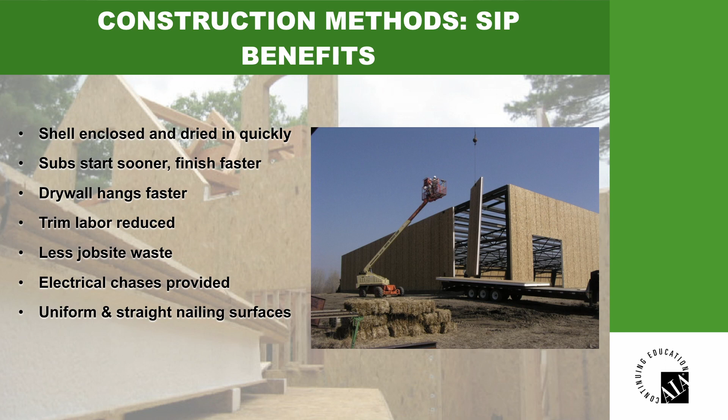SIP job sites will have less waste. Everything will typically be stronger, straighter, and truer because of the nature of SIPs and how they go together. Different commercial applications include any type of commercial building that is of a type that does not require zero combustibility of the products. There's very few commercial buildings that cannot be produced out of SIPs. This is just a short list of many of those that we often see built with SIPs successfully around the world.

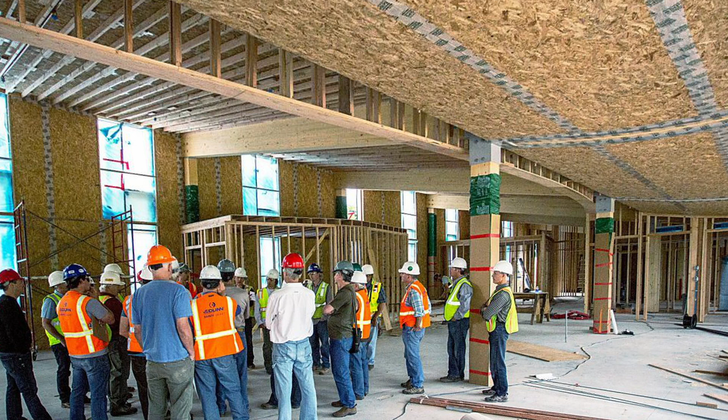This is a couple of photos of the Rocky Mountain Institute Innovation Center in Colorado. It was built to the Passive House standard. It was certified, which means, of course, it had air infiltration of less than 0.6. In this case, you can see it came in at 0.36 air changes per hour. And it has 83K of photovoltaic applied to it. It produces, I believe, about 2 to 3 times the amount of energy it consumes. It is considered to be one of the most energy efficient structures in the United States.

And it uses a lot of timber in that project. It also used some curved SIPs. One of the beauties of structural insulated panels is they can actually be manufactured with a curve in them. So it provides for some interesting design detailing.

They also enjoyed benefits with the fact that they were close to Nellis Air Force Base. They actually had reduced interior air noise, and that was a function of being nice and airtight, and so they didn't have a lot of that airport traffic noise coming into the classrooms.

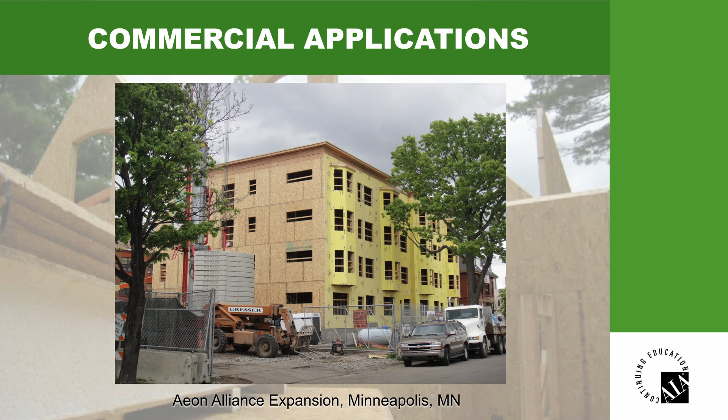The manufacturer, Extreme Panel Technologies, up in Cottonwood, Minnesota, the same ones that built their manufacturing facility out of SIPs on that steel red iron building, they designed and installed this panel package to 4 stories high, and it was an apartment complex that was LEED Platinum qualified. It was affordable housing, and it used 6-inch SIP walls.

So as we wrap this course up, you as a design professional should now be able to comfortably do a number of things, including discuss the basics of a structural insulated panel, what it is, some of the various types of panels and how the engineering works, codes and standards as it relates to the various types of panels or the basic structural insulated panel. Understand and identify what those energy efficient characteristics are, specifically the air infiltration specifics, and how these help improve the overall building energy efficiency. Understanding the waste reduction as it relates to product life cycle and the benefits of building with SIPs compared to traditional wood framing.

My final comment as we wrap up this program would be to say, please remember to specify a SIPA manufacturing member so that you can maintain quality and durability in your SIP structure moving forward.